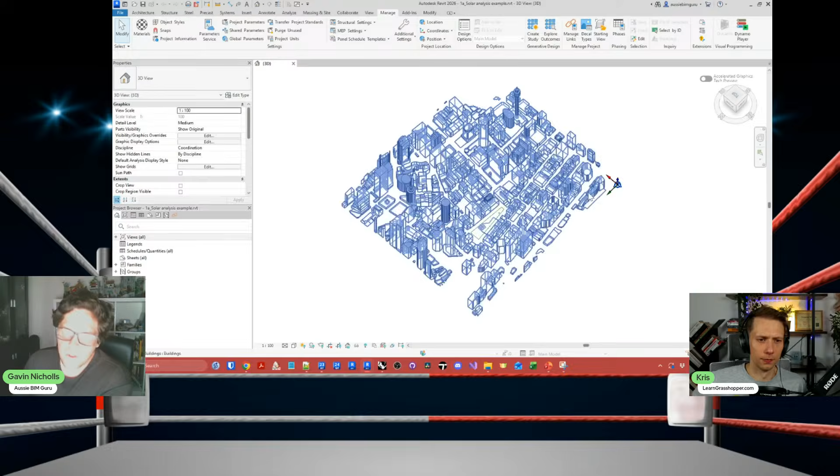So if I boot up Dynamo, which is currently sitting in the background, I'm running in manual mode, which is probably an important clarification for anyone that hasn't used Dynamo before. Grasshopper, generally, unless you put in gates and dams and mechanisms to slow down your script, will just try to run all the time in principle, in my experience. Whereas Dynamo has automatic and manual mode, also periodic, but we won't touch on that one. This is a little bit safer when you don't want your script to run while you're working.

Often it's how I end up using Dynamo. Now, in this case, I've already assigned a few things. I've picked a park, and I've told the park to get divided into a bunch of panels that I can test for solar analysis. I have consumed vectors from outside of Revit just to make my life easier. I did get these vectors from Grasshopper and Ladybug, funnily enough. You can get the sun direction in Revit, but it involves some pretty complex Revit API and some hacks as well, so I've already conceded that Grasshopper's helped me in this round.

But you can see that it ran a little bit slow there, right? There was a delay. It was probably about 3 seconds or so to divide this into tiles and run a ray bounce on the context. Now I'm using a special type of ray bounce in the Revit API, ray bounce by origin direction.

Behind the scenes, this doesn't actually require you to provide any intersectional geometry to Dynamo directly. If I asked for all the solids in this model, it would just crash. It will crash, and I'll probably crash it after this just to prove it. Or it's going to be very, very slow and I'll have to crash Revit just to keep moving on. But in this case, we can see that it has successfully run a ray bounce and figured out where the cityscape is being hit by sun rays, so I can determine roughly how much sun on a given day we're getting.

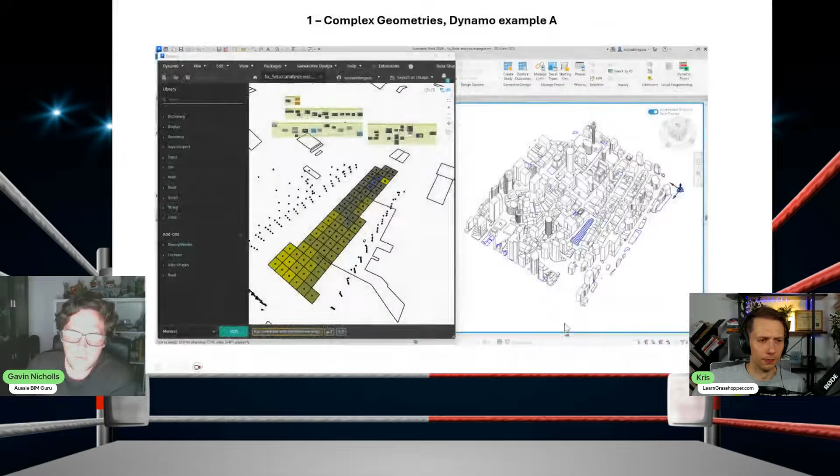So on the flip side, I can also just do the same in Grasshopper. In this case, I will be introducing Ladybug tools, which we'll talk about a little bit later. It's a fantastic package that does a lot of what I've just had to do in Dynamo manually. So I will concede to Dynamo in this case, that at least I have had to use native nodes for that whole script. This one, I've introduced a dependency, or a custom package, or an add-in, depending what you call them. In this case, I think they'd call them plugins in Grasshopper.

But if I jump over to Rhino, so this isn't Rhino inside Revit, this is native context in Rhino. I generally don't run analysis studies through Rhino inside Revit unless I have a reason to. Otherwise, I tend to export and keep it Rhino native where I can. If I unlock this, bang, done. And I put a 10-meter sample on this one just to at least be fair and equivalent, but I can push this pretty hard. I can just go down to 1 meter by 1 meter. And it shouldn't take very long.

Done. So you can see that the speed is already significantly faster. And I have built these nodes or similar nodes in Grasshopper natively before, or using Python, and you can get even faster than this if you take out all the other things Ladybug's having to do. You can make this at least double that speed. And that's not to say Ladybug is slow—Ladybug's doing a lot of things for us. But if you just isolate the few geometric things you need, you can really crank that speed up.

So if I go back to Dynamo, I can either do one of two things here. I can put the tile spacing to 1 meter and see how we go. Or I can even just, I think I've already asked for the geometry of these objects and it's already failed. So this is actually asking for that city object to give me its solids. And you can see it's throwing a pretty scary error at us, and another one, same one. So they both failed. I can't even crash Dynamo that way because it didn't work.

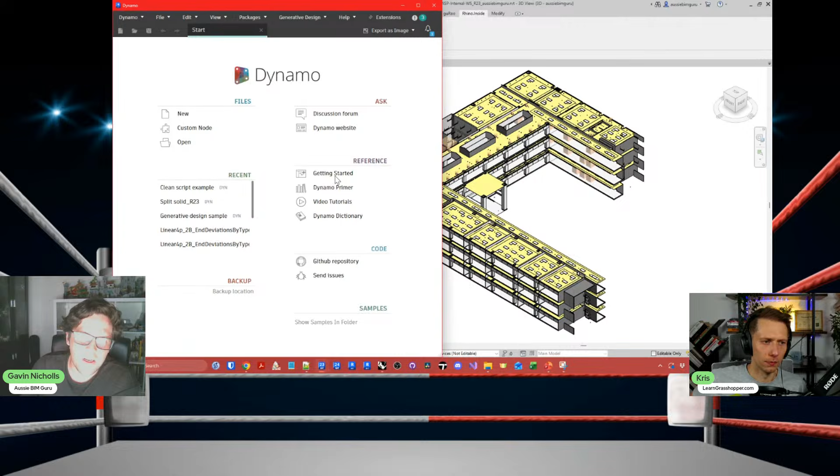But you can see it's still going, so I don't even know if I can compare the time between the two, because I don't know when it's going to finish. And we don't want to be here for the whole 2 hours just watching that spinning wheel, right? But this was the point, just showing and comparing. Yeah, and we have it already. So I've got another script that I know will finish in both cases that we can use for a true comparison of speed.

This one's just a basic attractor, a single point attractor, a very simple computational algorithm. This is sort of the second example, so that we can at least get a relatively fair, predictable runtime between the two. So you can see here I'm just doing a fairly simple script. This is sort of like your computational design graduate's first Grasshopper script. If it's not a twisted tower, it's a single point attractor, right? I'll just make a new Rhino model so we don't have any geometry to worry about.

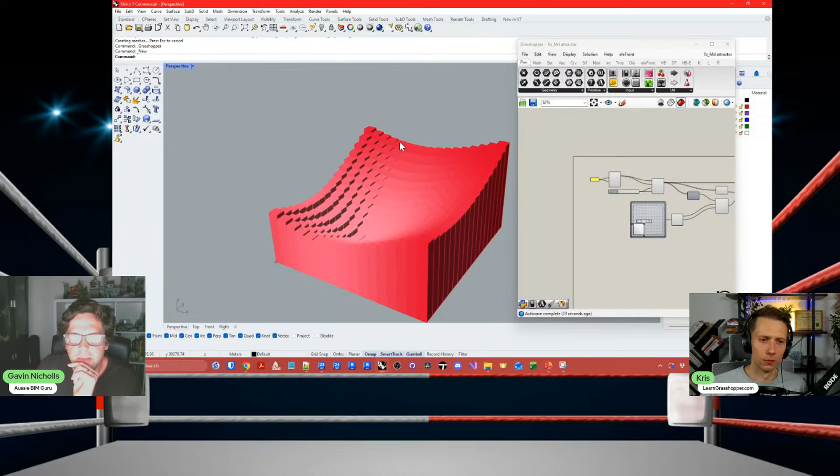So we have pretty much the exact same algorithm running, and I don't know if we'll be able to fit them both on the screen at the same time. Probably not. But let's say we've got a grid count of 15 by 15, and I've got an MD slider here, and it's pretty quick—not quite instantaneous, but pretty quick. The way I'm generating these solids probably isn't necessarily the most optimal way in Grasshopper, but it's the way I've chosen to do it in Dynamo, which is extrude as solid. So you could definitely make this faster if you built it in a way that Grasshopper enables, but for now you can see it's relatively fluid.

So I go over to Dynamo. I'm in automatic mode, which means we're pretty much always running. And I make sure I'm doing the same sampling, 15 by 15. You can see immediately we don't have an MD slider, which is already a bit of a weakness, but we'll talk about user interface a bit later. So I start dragging this—you can already feel there's definitely a chug there. It's still keeping up, but you can see I'm definitely ahead of the slider. Worth noting this isn't doing the U and V value at the same time; these are separate sliders, so the other one is processing the UV in a different way, which may also have some computational cost associated with it—probably not much, but still some. So you can see it still can keep up. It's not like it can't do geometry, it just depends on the scenario. And I know, Kris, you said we're not going to say 'it depends,' but I guess this is my first 'it depends.'

There will be a few. So I guess these were two examples I put together to show that Dynamo won't always just crash and die, like some people say, but it does have limitations that you can hit pretty fast if you're not careful.

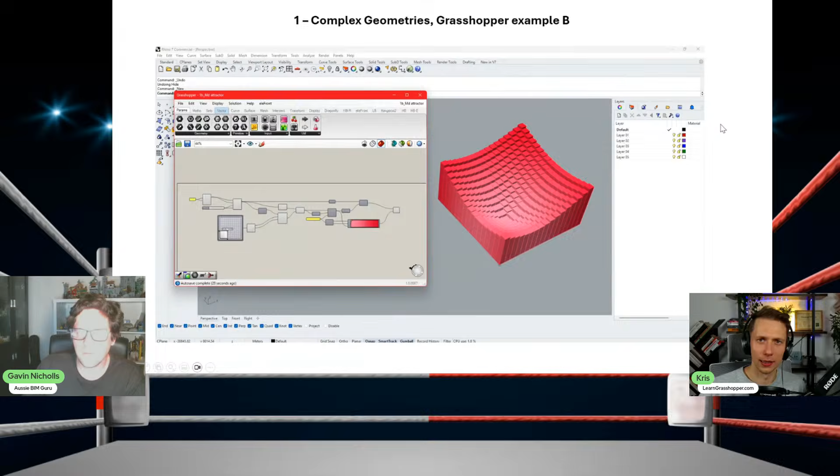Yeah, and you have to be careful while producing. So that's why we haven't scored Dynamo 0 here, because you can produce. It's slower, but still you can produce stuff. Yeah, it's very hard to give any of these criteria 0.

I think because there are still people working really hard on these programs that are very passionate about them, and to give anything 0 is basically to say you may as well not have bothered, which I think is a really harsh assessment to make of any software developer, because at the end of the day, we're all here trying to make this industry work.

So I forget if we have any 0s in here. We have a couple of 0.5s, I think, just out of respect for the fact there are product managers and people working on these programs, and I don't want to invalidate their work. But I guess before we move on, maybe Kris, you might have some comments as well.

I just was going to show some basic examples of the fact that you can introduce Dynamo into some scenarios in Revit. So we had some projects where we were dealing with fluted facade panels, and we had to modify the families to punch window openings through them. Users would have had to go to each of these and modify parameters to actually collate this void amidst all these families. It's actually built into each of those blades as a separate thing.

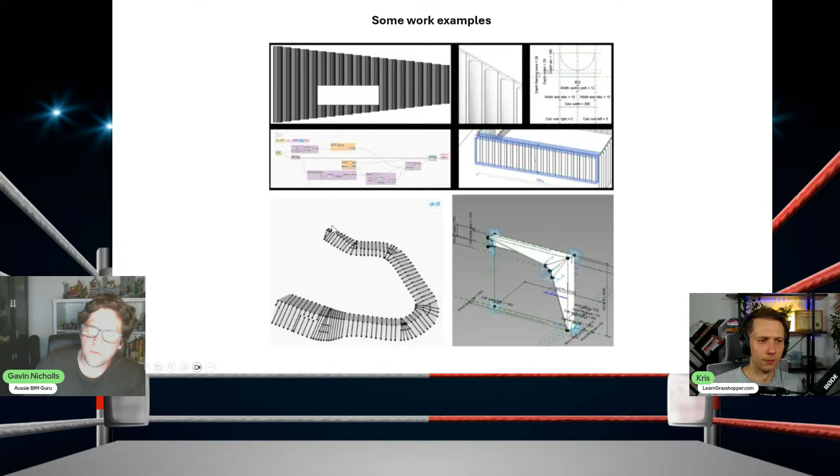So we used Dynamo at least to influence and find those heights. And we also used it to offset the bases to follow a raked roof profile that it couldn't naturally do as a loadable family. We used it to assess a high-level framing design for a project to do a high-level quantity takeoff, and this actually ran quite quick.

And then we do often introduce adaptive components, which we'll talk about later as well, especially with Rhino Inside. Sometimes we can use Dynamo to place these as well as just Rhino Inside. Whereas on the flip side, we often find geometry in Grasshopper very quick and easy to work with. It's very versatile. You can do a lot of things with geometry.

These are actually fairly basic examples. Some of the more complex things I'm probably not allowed to show just because they're quite bespoke and probably identify projects quite clearly. But we do things like, everyone's built their little block stacker at some point. I think Giraffe and all those programs are coming in and validating them now at this point.

This was a fun project where we were doing a waveform ceiling that we ultimately generated adaptive components for in Revit through Rhino Inside afterwards, but we did the ideation stage in Grasshopper. We use it for solving, so we have a desk solver like nearly every big architecture studio out there. There's a lot that are probably way better than mine as well.

And then we use it for distribution of elements around patterns and rails and all sorts of things that Grasshopper I find is naturally just attuned to handle. But you can push this thing way, way harder.

One thing while we're on geometry that I think we should talk about is Grasshopper comes with Kangaroo, which I think is really cool. Dynamo does have a package called DynaShape, which can actually do quite a lot more than I expected when I first saw it. But to me, we love using Kangaroo as well in Grasshopper. The physics is really interesting, the way you can apply it.

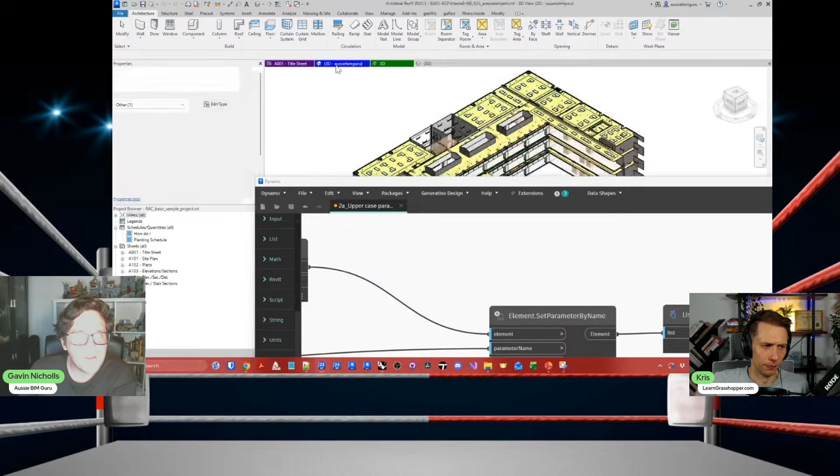It might have booted up on a different model. In fact, I think it might have, yeah, okay, it ran on this model, I'm pretty sure. Just to make sure - that is one thing Dynamo does, usually focus on a model. No, I think I'm actually on the wrong model. So you do have to boot up a Dynamo script from the model. Dynamo is not pointing at the current document. Which one is it? Hopefully not this one. Oh yeah, that's why - this model has no sheets in it, so I'm just going to close it.

There we go, we're at the sad house again. Okay, that's a pretty bad UX, isn't it? I'm just going to boot Dynamo up again.

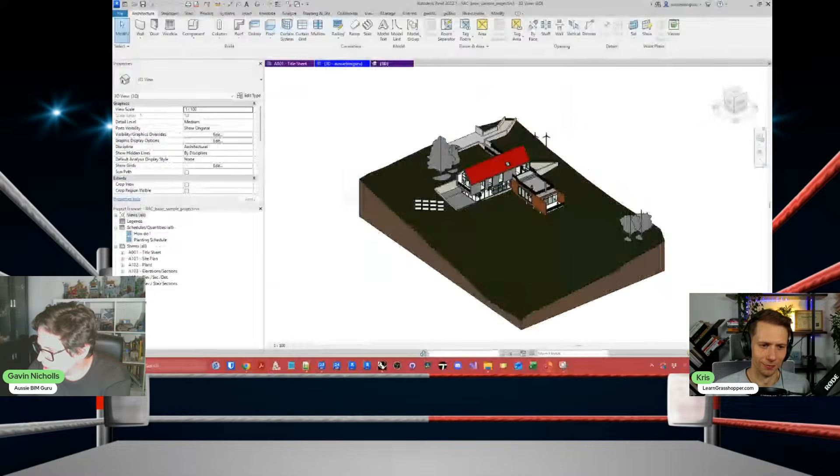So that can actually throw a lot of people off in Dynamo. What you saw just there is it wasn't happy because it wasn't pointing at a document, which is always a bit annoying. Rhino and Grasshopper, you have the benefit that you can only have one model open at once, so Grasshopper generally knows what it's focusing on, whereas Dynamo does add that complexity because Revit can have multiple models open at the same time.

So this should just work now. There we go - so we can see I've uppercased 6 sheets and done. But I can do the same thing in Rhino inside as well, and it's really not too different of a workflow. So in principle, it's the same thing.

We're going to get the same outcome, we're going to use very similar nodes, we're going to need to use Rhino inside. So yes, that's a dependency.

I've added some gates so that I tell the data when to write itself, and there's probably better ways to do this based on user comments, but that's generally the technique I use. In this case, I might be corrected here, and I hope I am, but I don't think there's a very broad range of custom packages that target Rhino inside at this point. So if I needed a node or function that filters out elements that aren't editable, I'm not sure where I'd get that in the Grasshopper community right now, but I hope to be corrected. Definitely correct me on that one.

And then from there, I guess the transaction is always going to be the thing that mostly takes the longest when you're dealing with Revit. So the speed isn't going to be that different in all honesty. If you had 5,000 sheets, you'd probably see roughly the same delay in processing because you're always dealing with Revit at the end of the day, and that's going to be the slow part.

So if I just get that model open again and I undo that transaction. For anyone that hasn't ever used Rhino inside, you install it like a typical Revit add-in, and from there you just start it up, and Rhino's now in Revit's memory space. It's up on its face doing its thing.

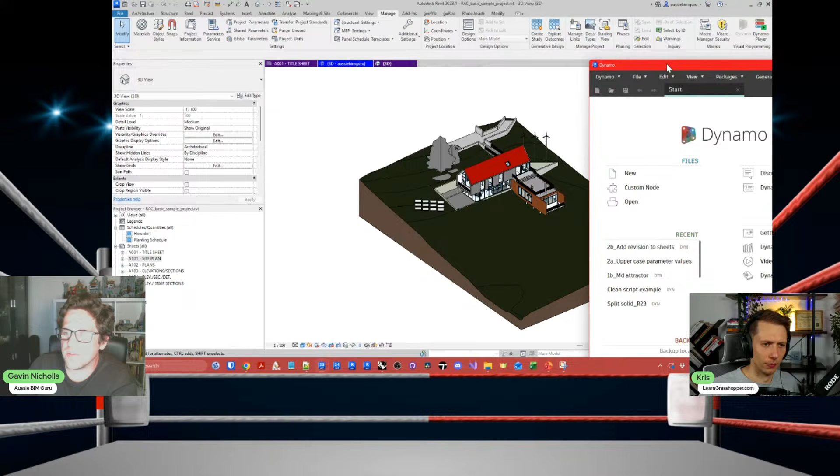All right, I'll just try that again, but this time I'm going to show the initiation for that process. This script is made to work through Dynamo Player, but what I need to do is select some sheets first before the automatic mode kicks in. I can probably say manual and just reopen it and hit manual when I want to, but the idea here is I'm trying to add some user experience to the script by making it only work on sheets the user has selected when the script is run. Then it's just a slightly different routine - I have a dropdown where I can pick revisions, there's only one in the model, and whether I want to add or remove it.

Now, these are custom nodes again, so I'm sort of cheating here. I'm using some custom nodes that don't exist in some versions of Dynamo, but this is really built to run through Dynamo Player. So I think in this case it's already run because it was in automatic mode, but it should have added a revision. Yep, there we go, to all of those sheets.

And the cool thing, regardless of whether you're in Dynamo or Rhino Inside, is these processes are generally scalable. If it's 5 sheets or 5,000 sheets, it doesn't matter, it just takes a bit longer to run, but these are all scalable tasks. So if you're looking for ideas of things to automate in Revit, you might get some ideas from this. These are quite boring tasks, just very necessary things that we have to do.

But if I go into Rhino Inside, I've got pretty much the same, and I think they actually had a node for it that I just clustered. Oh no, I wrote some Python. So this is sort of, I guess, when I use a custom node in Dynamo, you can do the same thing but use Python as well to access the API natively, which we'll talk about in more depth. But I guess what I've done here is created a Python cluster, or a Python node in a cluster, and you can directly reference the Revit API.

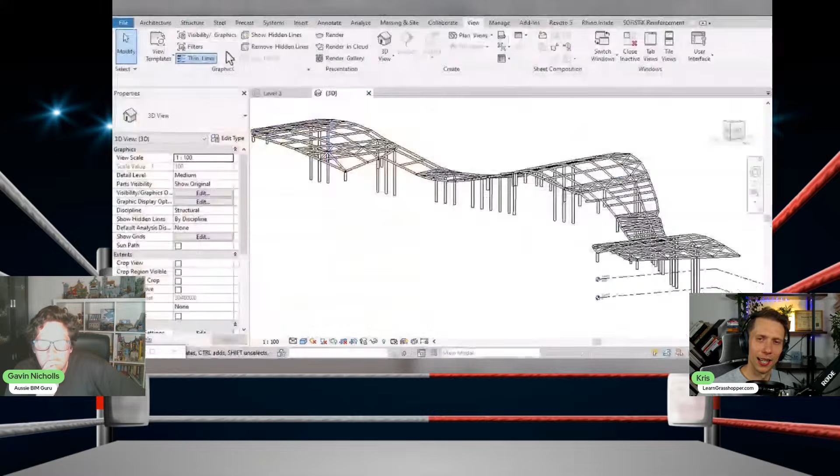I can show this example - when you're transferring data, for example, to SAP2000 through Grasshopper with Rhino inside, you can have it as one node just divided into columns, beams, and do all the data manipulation much faster. So once you get through this entry level, data trees are really helpful when it comes to speed, but also readability.

I'll list out some advantages of using Grasshopper data trees. First, we have this structured hierarchy with addresses - all these zeros are not unnecessary, this is something we really need. And if you're working in the AEC industry, it can really be associated with floors, grids, points, so you don't lose where it comes from.

The second advantage is we have lots of native tools like graft, flatten, simplify, path mapper, available with just one click when you'd like to flatten or graft. Once you get the idea, it's really easy to manage. And the performance - everything is compiled in C#, so there's lots of speed in the data trees.

However, we have some disadvantages. As I said, there's a steep learning curve. The path syntax really takes some time to understand - even advanced users still have problems with it. Debugging can be really difficult. From my experience teaching Grasshopper in many of my trainings, 90% of Grasshopper problems come with data trees. Sometimes it's mesh issues or breps that aren't closed, but 90% are coming from data manipulation and data trees.

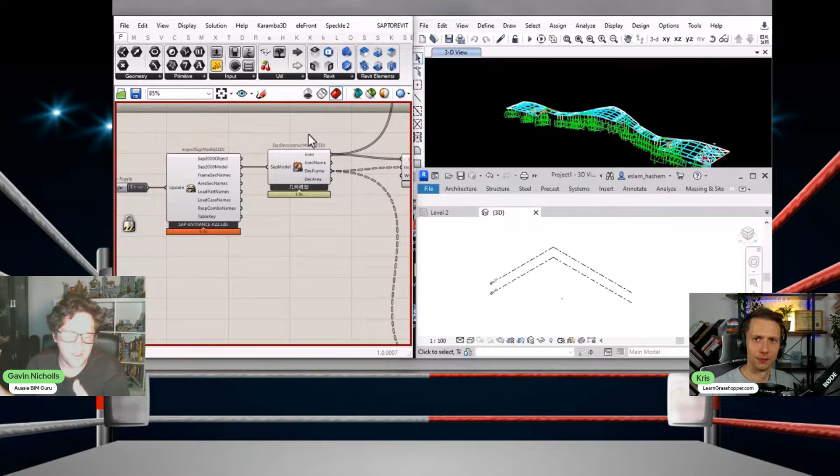List in Dynamo - I mean, you can do lists in Grasshopper technically in Python, I guess, so they do exist as a concept, you just have to pivot to them. So I guess trees for me are necessarily complex, right? They're there to foster complex geometry structures and necessarily very deep trees sometimes, like 5-6 levels deep in data structure.

Generally in Dynamo, my rule of thumb is if you're dealing with anything beyond like 3 levels, you've probably overcomplicated your workflow. Very commonly on the forums we'll see a 2-deep list and then a 3-deep list, and we're like, whoa, why do you have inconsistent data structure? Something's wrong there. So lists usually are great because they're simple, tackling more simple, regular, parallel sort of structures of information.

Before I jump into Dynamo, it's worth pointing out that lists, trees, all of these structures computationally are actually just hiding a much more complicated system behind the scenes from us. My understanding is that in C, or in very low-level, less abstract computing, lists are built out of what's called a struct, which is a piece of data and two things above and below it called pointers that say either go here or go here, if you're going forwards or backwards in a list. Whereas trees support a different sort of structure using a similar concept.

So when you're searching through a list, sometimes it's going to be better to use a list and sometimes it's going to be better to use a tree, depending on how you're working your way through that data structure behind the scenes. That's always going to have a big difference in when trees shine and when lists shine.

I don't know if there are too many scenarios where lists are better than trees. I assume just because the Revit API is naturally working with lists, it makes sense to be working equivocally - that's probably just going to have benefits.

And most of the software outside - I think there's no software that works with trees, right? When you're going to export... I mean, there's definitely branches of computing that work with trees, and similar concepts to trees. Hash tables aren't too different to the logic of what a tree is trying to do - it's trying to create the shortest possible way to get to an object without having to go through the entire list to search for things. I'm sure there's all sorts of use cases outside of AEC for trees in computation.

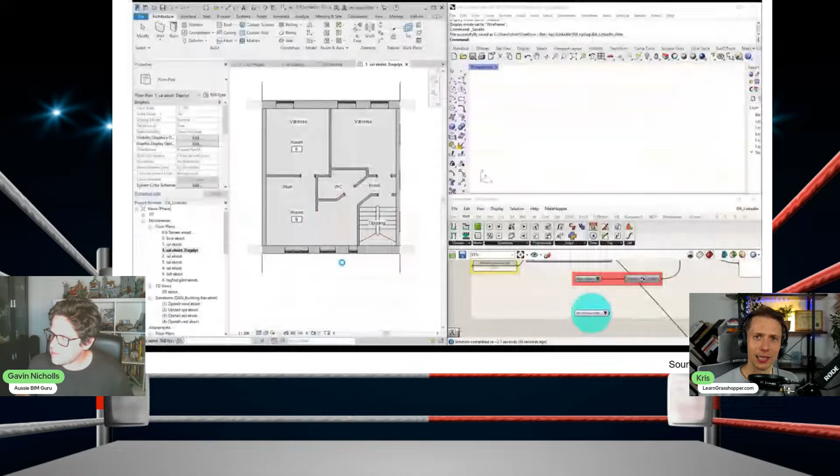So it's a really cool way that you don't have to just work in a Rhino Grasshopper environment. With Rhino Inside you can also put all the results for the rooms and parameters for the solar analysis. I know you prepared some examples too, you have some experience at your company, so I'm really looking forward to seeing that.

I'm not even going to pretend for more than one slide that we really use Dynamo for sustainable and ESD focused design. Ladybug tools, it kicks ass, sorry to swear but it's that good. It's industry standard. I was justifying it to a council the other day, it is what we use. They were saying, oh, how reliable is this? And I'm like, if you can't rely on this, there's a lot of bad buildings out there. If we got the results wrong, there's a lot of towers out there that got the results wrong.

So you have things like Forma. Honestly, I haven't been able to get excited about Forma yet. It feels like a dumbing down of things we already do better, at least from an ESD perspective. It does have wind analysis though, which is interesting because CFD is very complicated.

If CFD takes less than a few hours to run, I always question if it's accurate, because CFD is computationally heavy and should take a long time to run most of the time if you're doing it right. But yeah, we use Ladybug all the time.

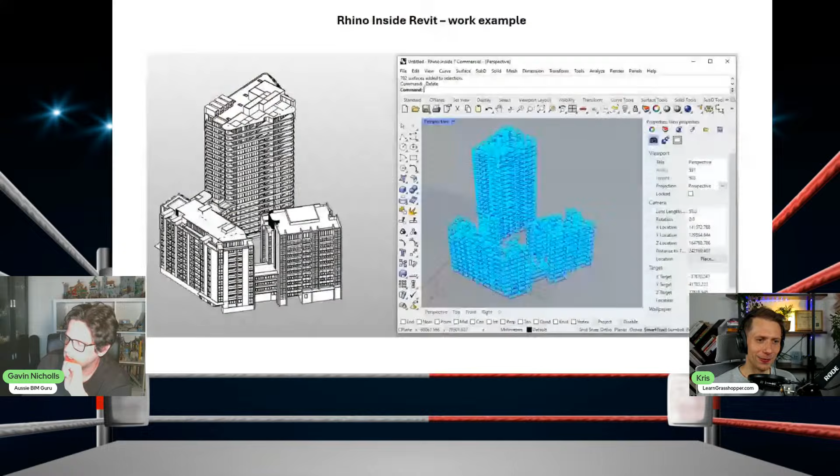Yeah, pretty much agree. They've got Civil 3D support, Revit support, and historically a few other types. They're working on a Forma connection, but the one thing in common is that they're working within one ecosystem, which is a huge drawback for an industry with many more moving parts than just Autodesk users. We have fabricators that have probably never touched an Autodesk program in their life - Tekla users, for example, probably never opened an RVT and probably never have to.

I'm taking a few hits here, so I'll take this one as well. I admit, even my favorite connection to Revit beyond Dynamo is Rhino inside, just because of the stuff it enables. Whereas the Civil 3D connection doesn't do much for me because I don't use it. If I was a Grasshopper user more regularly, there's probably more programs I'd plug it into that it supports. So from an architectural perspective, it also probably has more versatility and capability, even if there's a few Autodesk products we could potentially relate it to.

We'll have to see what happens with the Forma connection - that could go quite far depending on where they take Forma. But at the moment it still feels more like a beta stage. I don't know if it's formally in beta anymore, but it definitely felt like it was still developing the last time I tried it out. I just put on screen my favorite example from Rhino inside, when I first started, where I managed to beam in all the Revit rooms or surfaces with all their data and push it back. Again, it's not a Dynamo use case - just my hat off to Rhino inside again.

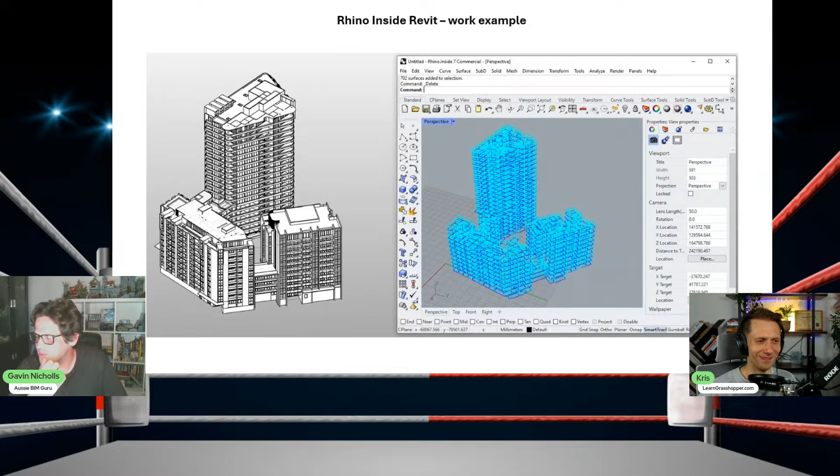So yeah, it's a clear winner, but we gave some points for Dynamo for the integration with Civil and some Forma. Let's jump to round number 9, generative design, and Grasshopper is really known for that.

Especially thanks to these 3 amazing plugins: Galapagos, which is natively in Grasshopper, so you don't have to install anything, you have Galapagos already. Wallacei and Octopus are also free plugins to download.

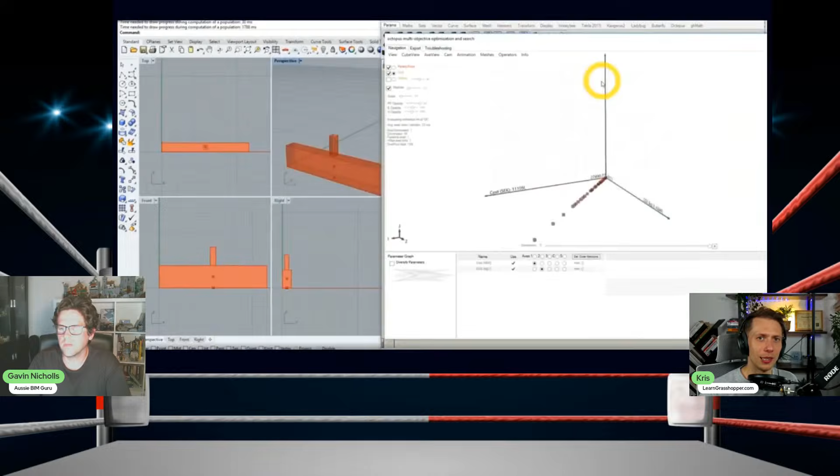I really like also to show these examples of the foundation when we have constant force, normal force for the foundation. We have some parameters for the concrete, price for the concrete and price for the steel, also CO2 equivalent for concrete and steel. You can compare what is the most optimal solution, and you can optimize by price, by CO2 emission, building costs, and at the end choose your winner solution.

I know, Gavin, that you also prepared some cool stuff that you've been working on, so you can share. So for me here, Grasshopper, I've seen most of the Grasshopper, but I really also want to see Dynamo in this field. Yeah, so funny one, that one.

So I guess Dynamo introduced a generative design tool into Revit that runs Dynamo scripts through Revit 2021. Now, funnily enough, this is going to be interesting if anyone from Autodesk is watching. So I'm in the Autodesk developer network where you get access to Revit for the sake of developing things, doing promotions, things like that.

Funnily enough, generative design is a separate product, and I forgot that, so I don't actually have a licensed version available to show at the moment. That's actually a bit of a drawback for generative design, because Grasshopper is built in, ready to go. So I'm actually going to say, I think that's pretty poor from Autodesk's front.

But anyway, this is, I guess, a Dynamo script that's set up with geometry in place to run a study with various controls to move a building around a site. This is an incredibly simple study, just simplified so I can show a comparison in Rhino Inside. This is one of those problems where the answer is probably quite obvious.

Which is, how can I get the tower with the best view aspects in this neighborhood? And the answer is going to be obvious: go to one of the corners and make the tower really tall, because that's where you're going to get the most open space. But I can't run it because I can't license the generative design tool.

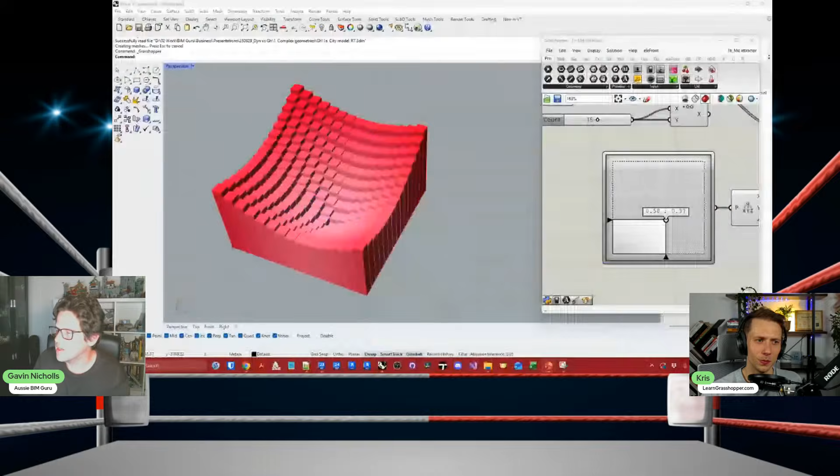But I guess we'll look at Rhino Inside instead, because this one just works since I've paid for a Rhino license. I'm currently using Rhino 7 because I have Rhino 8 at work, but my business has Rhino 7 since I haven't actually consulted in Rhino for a while. So I think this is just vanilla Rhino. I need to actually go into Rhino Inside.

So I've got basically the same model. Goodbye, Dynamo. I'm going to boot up Rhino Inside, which is already here, and open up a generative design script that's been built for this scenario.

So in principle, generative design generally works in a few ways. With Galapagos, usually you have a gene pool with various sliders that you can randomize. The limitation with Galapagos is that it's single objective, so you can only measure fitness in one way ultimately. In this case, I'm just saying how many good views do I get.

That's my fitness. You can build formulas that create a fitness using many variables. You can also cull fitness - if you exceed a certain thing you don't like, you can just make the fitness zero based on a formula to get rid of invalid options, like if my building was outside my site boundary. There's a lot of things you learn over time in generative design.

But you can see, as I change this, my tower proportion changes. I can move it around in the X and Y aspects, and ultimately you end up with this node. This is just one solver - there's Wallacei and other ones that are way more complicated, but they take more time to set up.

So I'm measuring a fitness - in this case, how many good views did I get? And I can visualize it. So that's effectively what I'm looking for - I'm looking for the opposite of this. I'm saying, okay, when do I actually get good sight lines? These are all the ones that are obstructed, and these are all the ones that make it through. So I'm measuring how many times that happens on this site.